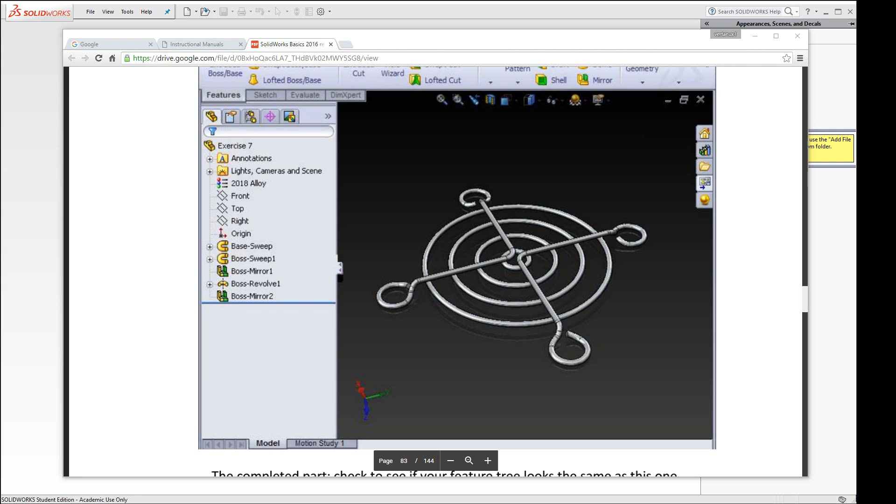So let's begin at the very start here. We're going to go ahead and just draw one of the foot pads first. And you can see here it's a combination of two sketches, a front and a right side view.

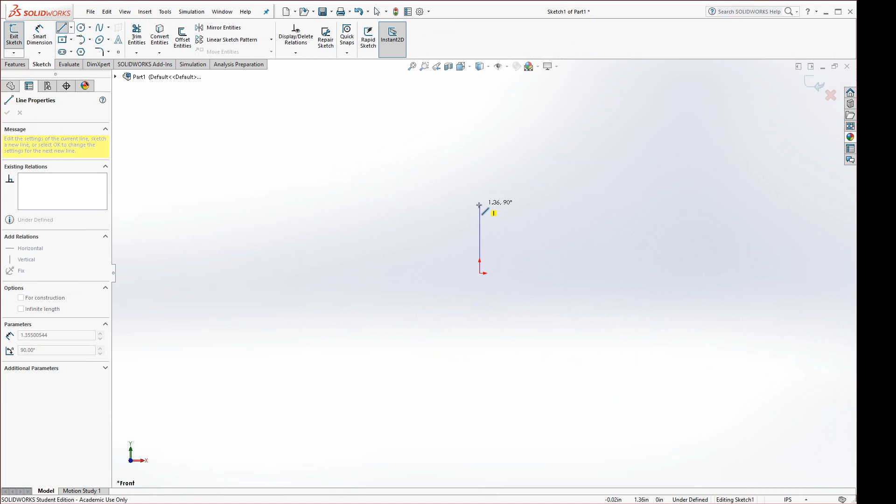Start off with a new part file. Select the front plane and start a sketch. Take the line tool and at the origin, snap to it and draw out a short line about 1.5 inches in height. Make sure it's vertical, and then hit escape.

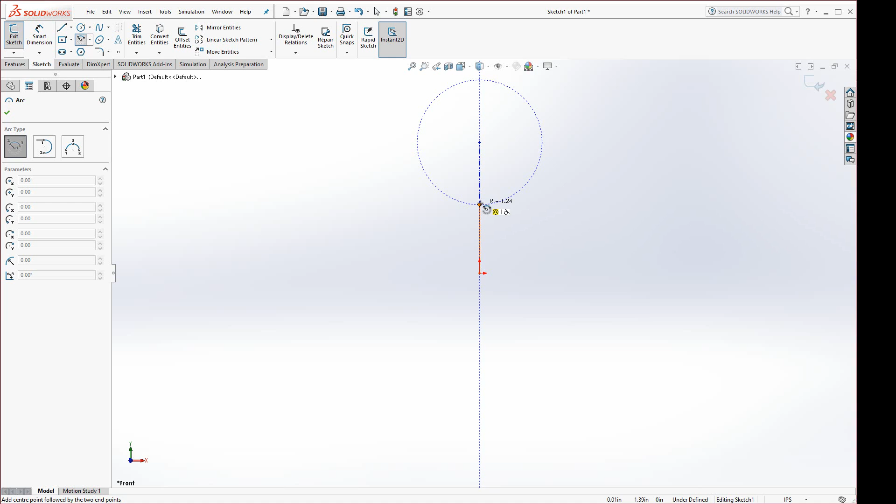Now go ahead and go to the arc tools, hit the little arrow to the right of it, and find center point arc. With center point arc, move your pointer directly above and in alignment with the line you just drew. When you get the inference, click and connect it to the vertex of the line that was drawn earlier. Click again once you connect, and then move your pointer counterclockwise, from the 6 o'clock to 3 o'clock to 12 o'clock.

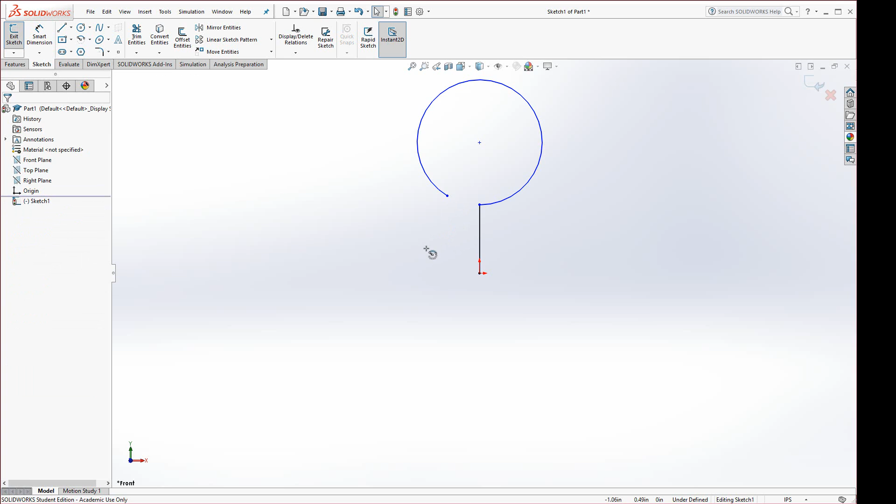In this case, actually, you want to get to right about 7 o'clock-ish. In other words, A is equal to about 320 something degrees, approximately there. Click, and that leaves a little opening. Now go ahead and hit escape a couple times on your keyboard and hit the F key to fit it.

We want to snap this point in alignment vertical to this. So go ahead and select this line and hold Control and select the center point, and on the left, make it coincident. It looks at that line as if it's infinite. Now it's not going to move left or right.

The next thing we're going to do is go to the Smart Dimension tool and add some dimensions here. So if you click on this endpoint here to the arc, drag out the dimension, and if we look at our book, it's supposed to be 4 inches.

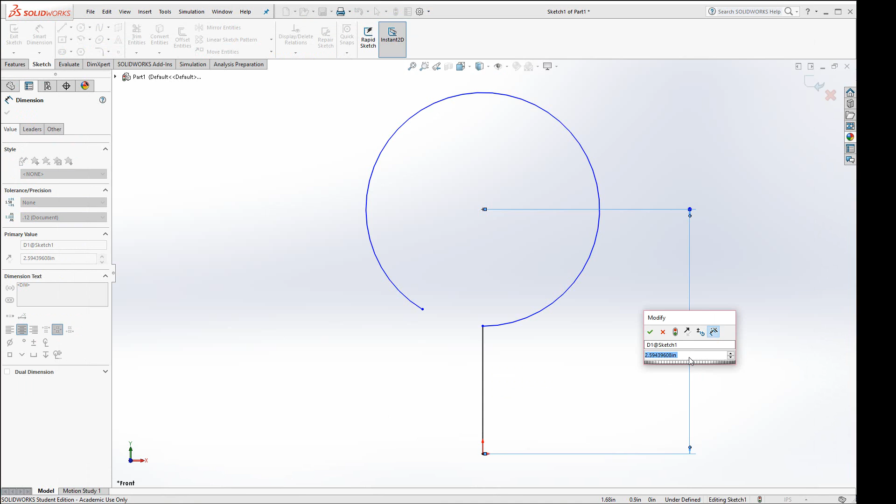Alright, the next dimension we're going to add is the 1.5 inch radius. So that's just on the arc, 1.5.

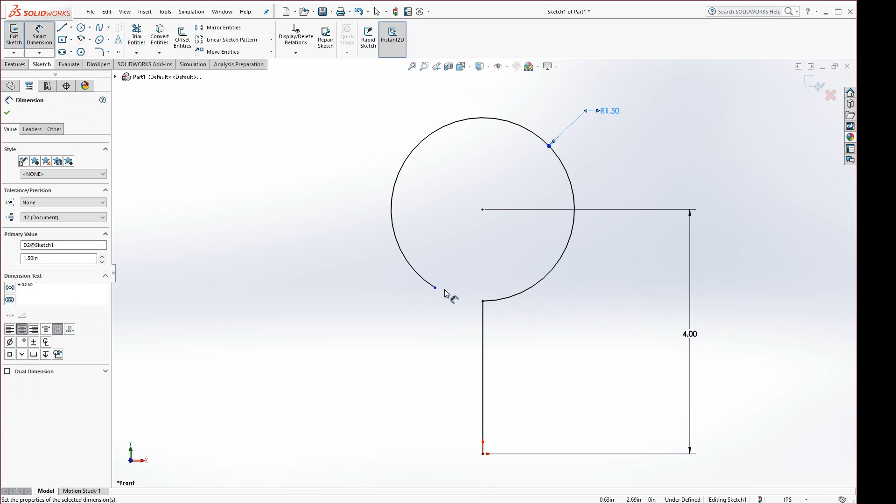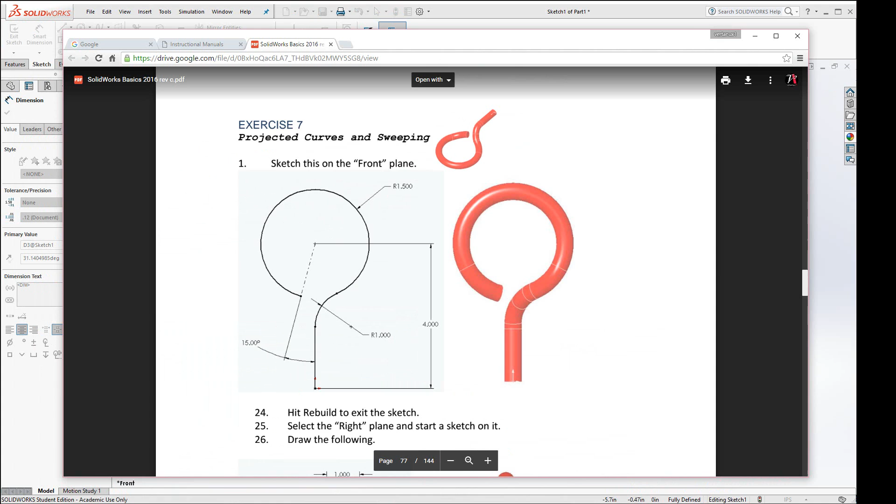Then go ahead, we're going to add a dimension for the opening. Here's a little trick: select the endpoint of the opening there and the endpoint over here, and then click on the center point of the arc. Drag between the two, click to drop it, and we need to specify 15 degrees for that. So go ahead and type in 15 and hit enter. Make sure it's centered in between there.

Okay, now we could add our sketched fillet. So go to the Sketch Fillet tool, and let's set it to 1 inch, and select this intersection and hit the green check.

Now go ahead and to exit the sketch, you could either hit exit sketch on the left or hit rebuild. Either one is fine. If you rotate this around, you can see it's just flat and planar. So that's looking at this little foot pad from the top, or in this case the front.

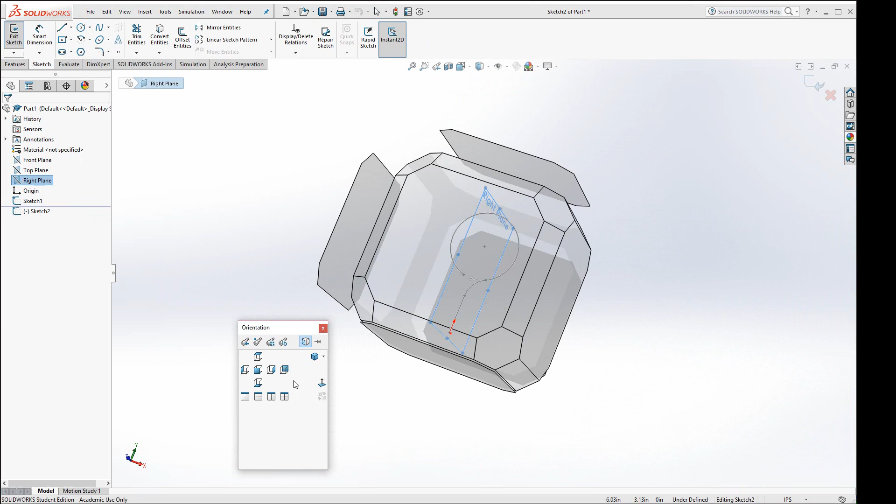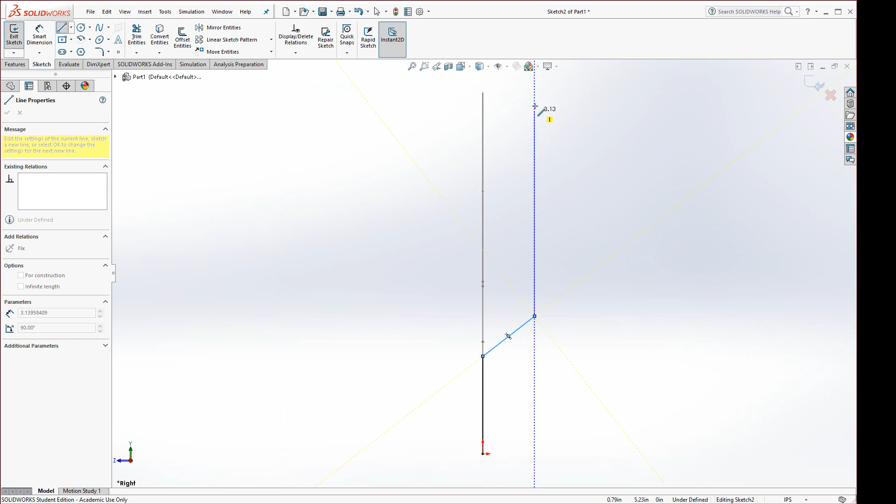Let's go ahead and select the right plane now and start a sketch and draw the right profile. I'm going to hit the space bar and go to the right view and take your line tool and glide up to the very bottom here to the origin. When you get the orange dot, click, drag it up about 1.5 inches. Make sure it's on the line, click, drag at an angle about 1 inch. Don't worry too much about the angle just yet. Then just drag up a line about 3.5 inches and then hit escape.

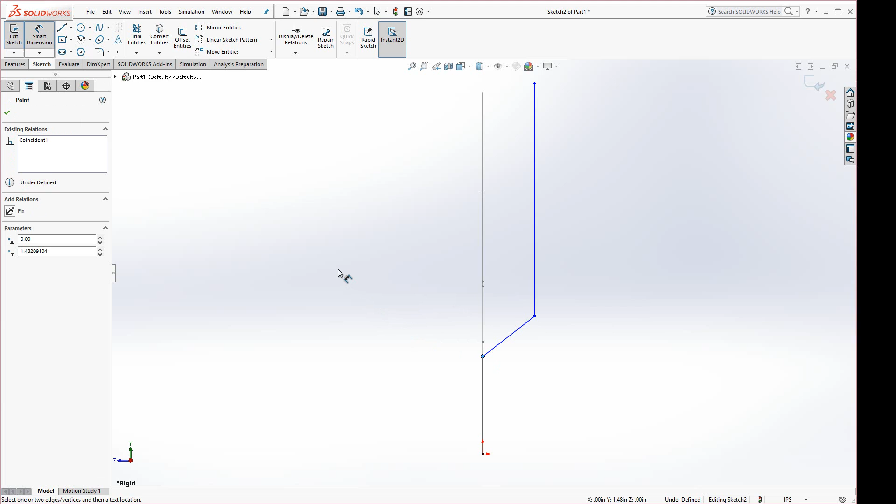Go to the Smart Dimension tool for the first couple of dimensions we need to add. Looking at the book here, we have a 2.0 TSC, which indicates a theoretical sharp corner. Go ahead and select this corner, then move your pointer away and hit the right arrow key one time to expose the center point of the arc we want to attach it to.

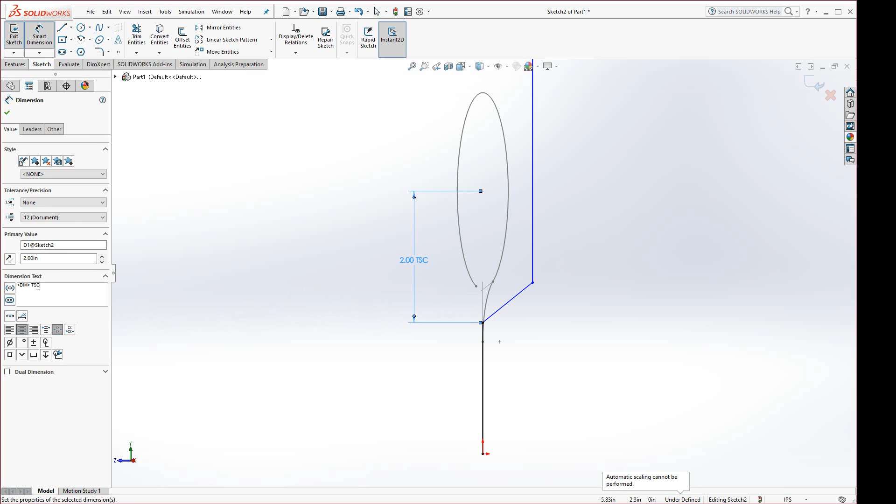Click and drag this over to the left, click to drop it, type in 2 and hit enter. While that's still active, if you wanted for later use you could type in TSC, though it's not necessary. Hit the left arrow key one time to rotate back in position, or spacebar, and select the right view orientation.

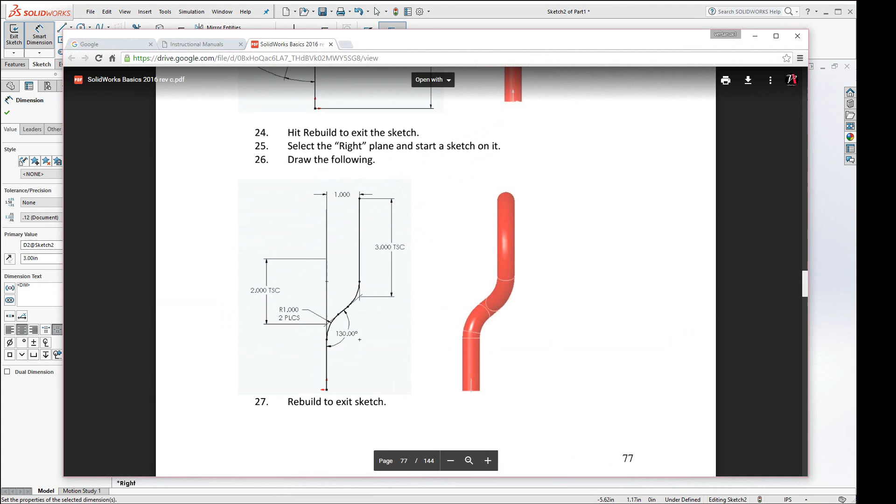Let's go back to Smart Dimension and add the next dimension, this 3-inch. Click on this, that's going to be 3. Now let's add the angle of 130 degrees. Click on this line to this angle, and there, 130. Then click on this line and drag it straight up, somewhere in the middle here, click and make that 1 inch.

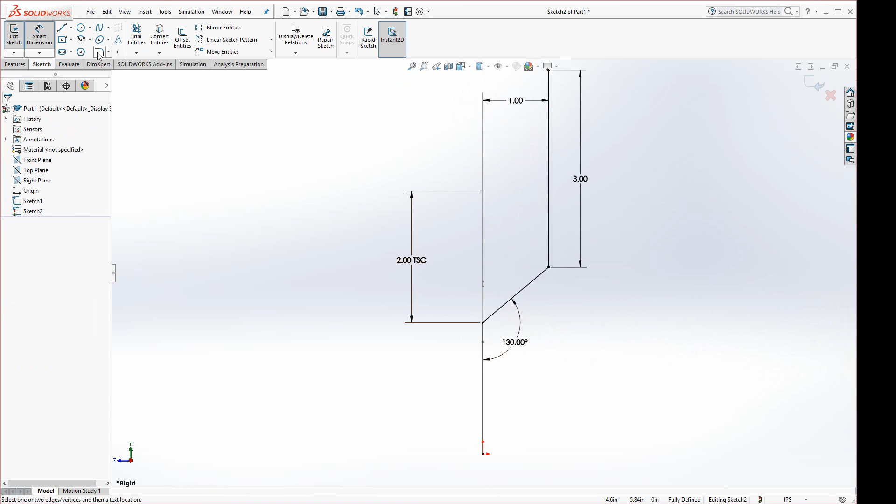Now we could go ahead and add the 1-inch radiuses. Go to the sketch fillet, and it should remember from last time. Just click on the 2 intersections and hit the green check.

As we rotate this, you can see now we have 2 separate sketches. Hit the rebuild button, and the goal here is to combine those two, the attributes of both. Imagine this one down here is a right side profile of a tool, like a die, and we want to bend this curve onto it. That's what we're going to do - we just go to Insert, Curve, and Project it.

You'll notice you have Sketch on faces. You could do it where you actually make the tool and then have it bend it on there, or just go to Sketch on a sketch. Now it's not technically bending, it's just adopting the attributes of both.

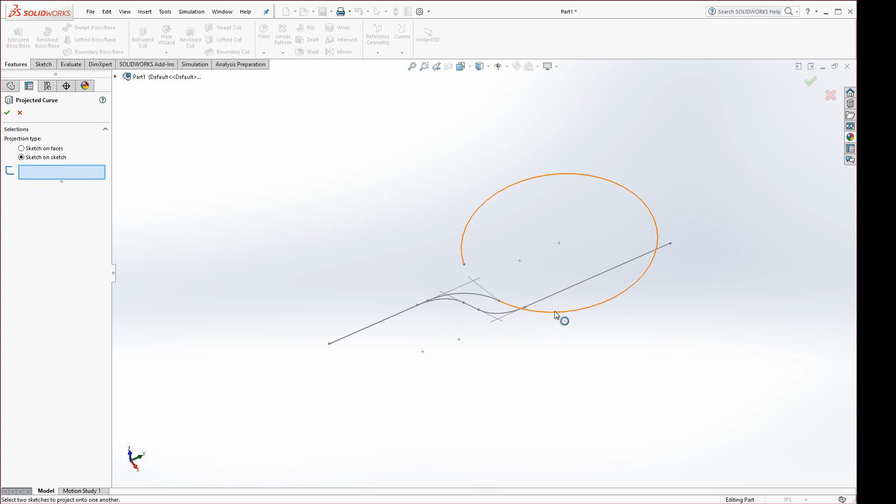Go ahead and select both of these curves, and you'll see a preview in yellow up here. Hit the green check mark, and then click off of it, and now you can see we have our 3D guide curve.

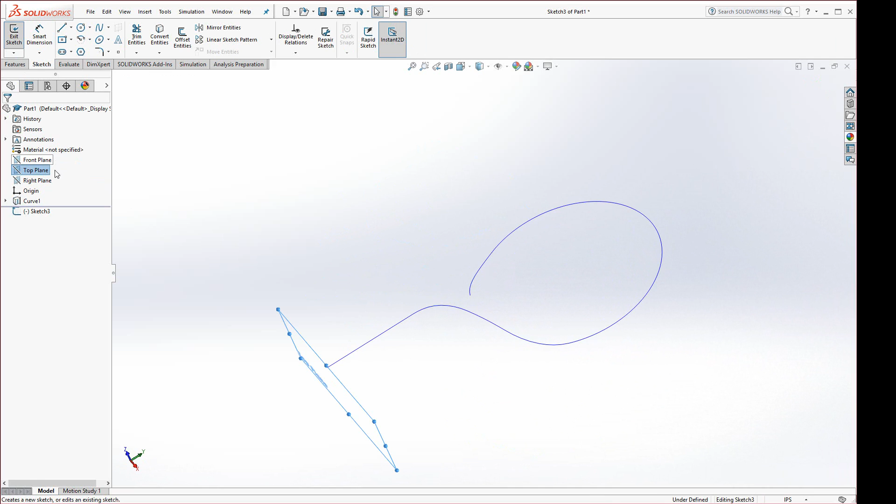Go ahead and select the top plane and start a sketch. Take the circle tool, and at the origin, make sure you get the orange dot, click and drag out a circle. Let's dimension that at 0.5.

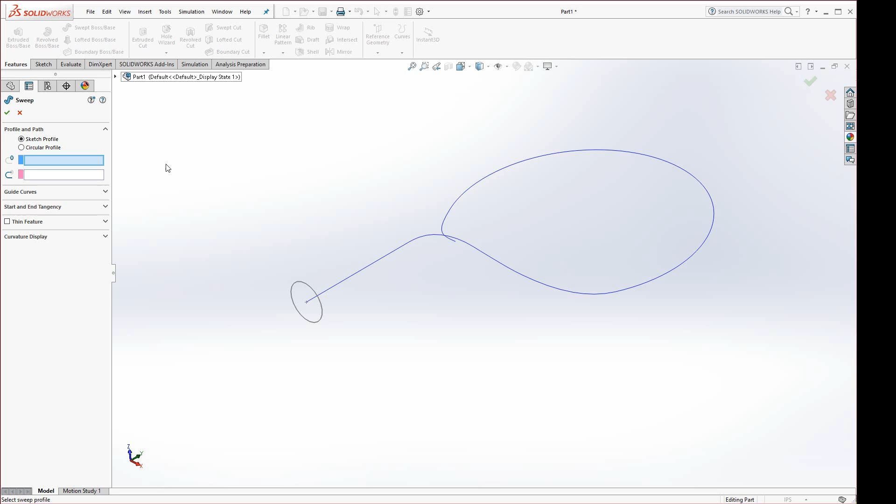Now go ahead and hit rebuild. It's important to exit out of the sketch before you can sweep. So now you could go to Swept Boss Base, select the circle for the profile, and then the blue curve for the path.

You could right click. Okay, and so here we have our profile, or I should say our model. We could hide the curves if we hit this little arrow, right click on the curve - it is actually turned off. Oh, I'm sorry, right here, right click and hide. So we don't need to see that.

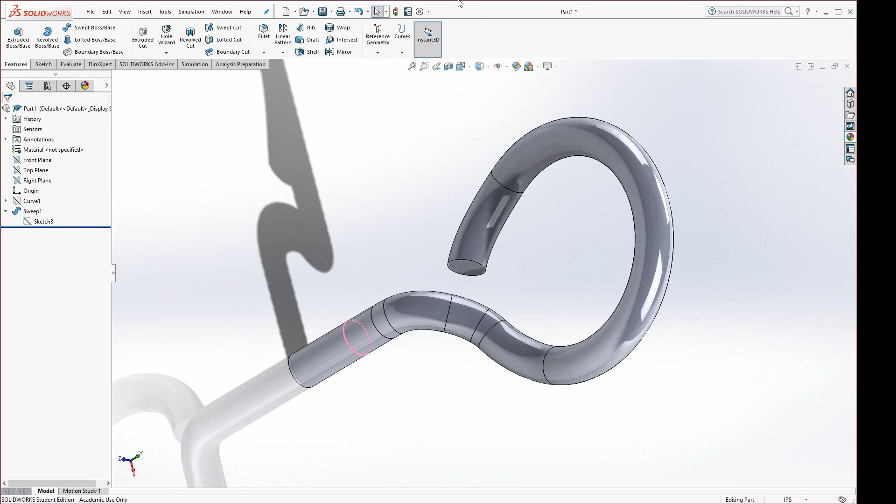Now the next thing we're going to do is draw the extension of this. We could have drawn the extension to begin with. I've just learned over the years of teaching this that sometimes it's better to take it in small chunks for students' sake. But if you're a more advanced user, by all means you could have done this all in one shot.

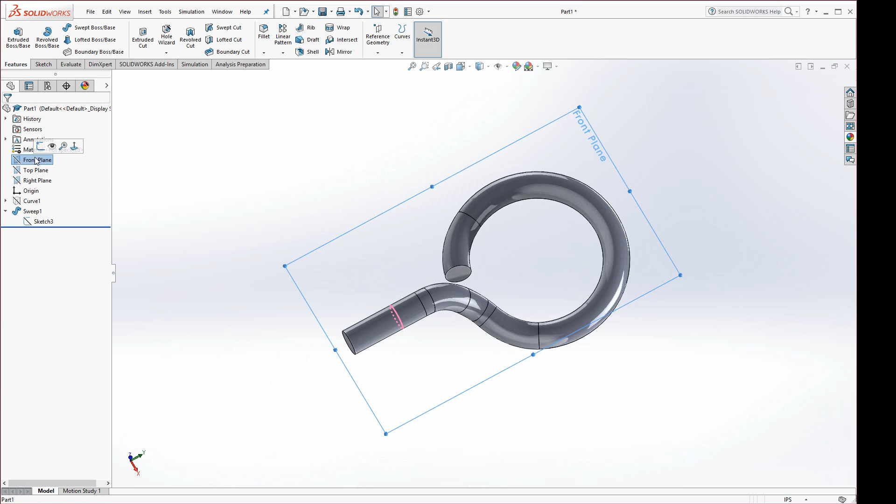So now I'm going to go ahead and select the front plane and start a sketch. I'm going to go normal to - oops, I'm actually just going to click on front. Now I'm going to take my line tool, and at that origin click and drag a 7-inch line down. Now you could actually just move your pointer out.

Instead of going to tangent arc, which you could do by activating the icon, you could just tag back where you started and drag it straight down and to the left. I didn't click, I just tagged back where I started, and so it leaves a little hook here. The angle should be less than 90 degrees on this one, and the radius is going to be about 1 inch. So click - you'll see where I'm going with this in just a minute.

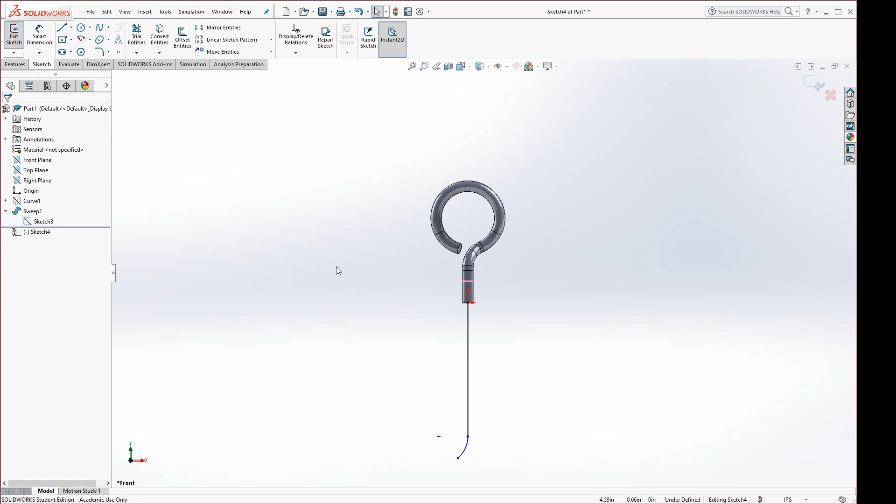Go to Smart Dimension, add your 7-inch dimension for the length of the line, add a 1-inch radius, and now we'll repeat the steps where we made that opening here. Same thing, just click on the two ends of the arc and then the center point of the arc, and drag this out to the lower right. That's going to be 45 degrees.

Now I'm going to hit rebuild to exit the sketch. I could go ahead and select this face here and start a sketch. So don't miss that step. You have to start a sketch on this face.

While that face is selected, or if you select the edge, either one, go to Convert Entities. Convert Entities is a great tool. It projects the edges off of any geometry that you have on the screen, virtually any geometry.

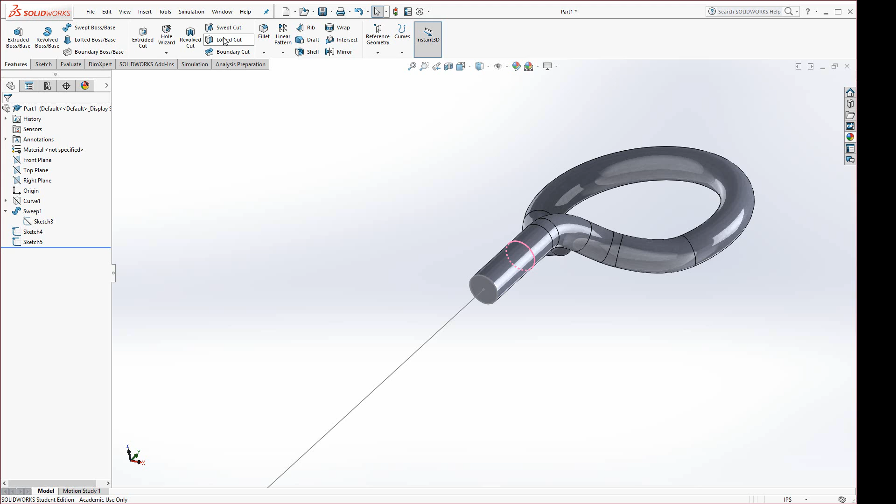And so now we could hit Rebuild and go to Swept Boss Base. Go ahead and click on the new profile and then select the path. And you'll see it will continue on. Hit the green check. And again, you could have done this all in one shot if you wanted.

All right, the next thing we're going to do is we're going to mirror across that face. Since we had it at 45 degrees, when we mirror it across, we'll have a full 90 elbow. So let's go to the mirror tool.

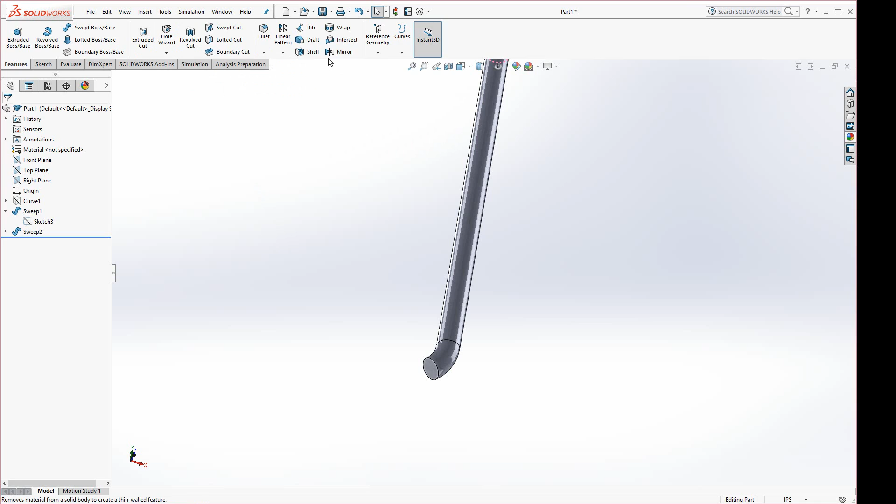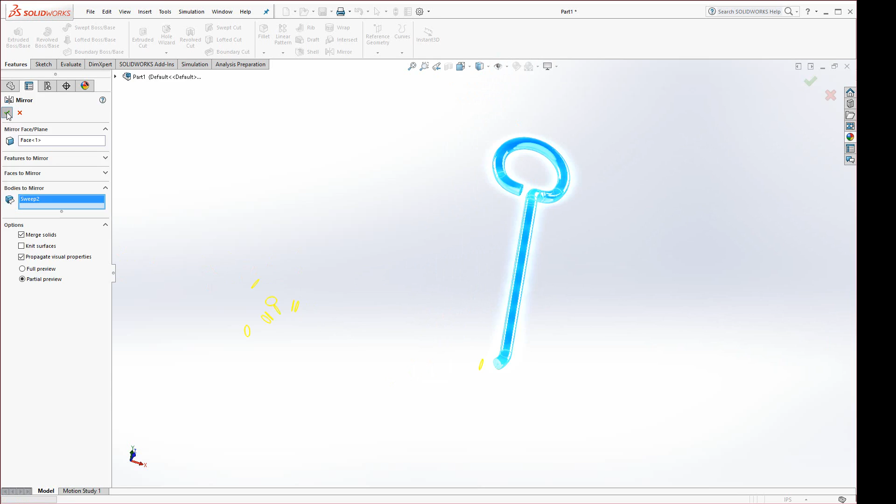For faces to mirror across, just go ahead and select this face. And click in the bodies to mirror. Use the bodies to mirror for this one. You won't see a very good preview because it's all radial edges, so they don't show up as you might expect in the preview. So don't worry, just hit the green check, and it should turn out with a 90-degree elbow.

Now let's go ahead and select the right plane and start a sketch, because we're going to put in the concentric rings.

Now zoom up to the very bottom here. There's a couple things we need to do. Go ahead, and it's a good idea at this point to change it to wireframe temporarily.

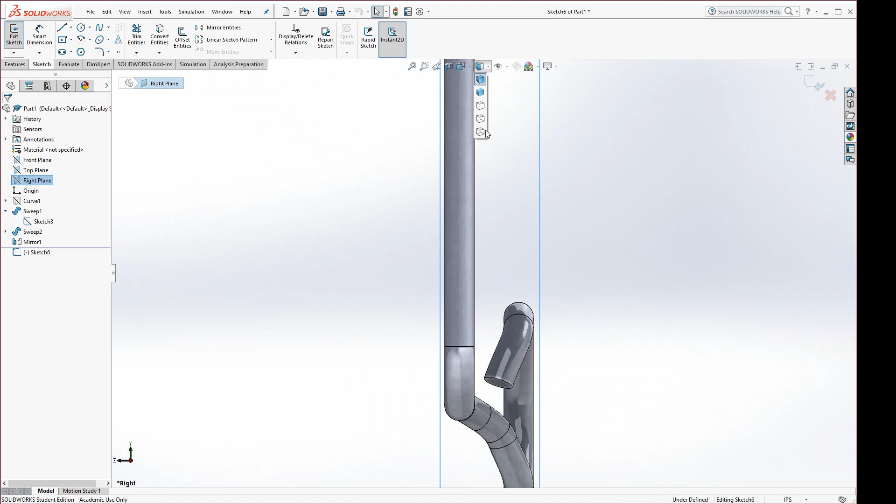Now again, I'm zoomed up at the bottom here. I'm just going to hit escape. And I want to capture this edge here so I could snap a center line to it, because we need a center line to locate the center of the entire model once it's completed. And thus, to complete it, we need the center line.

So click on this little arrow, find the center line tool. Move over to this edge. When it wakes up that center point, move to the center point, click, and drag a horizontal center line across, about 1.5 inches. As long as it's horizontal, you're in good shape. If it's blue, delete it and try that again, because you might have missed that center point.

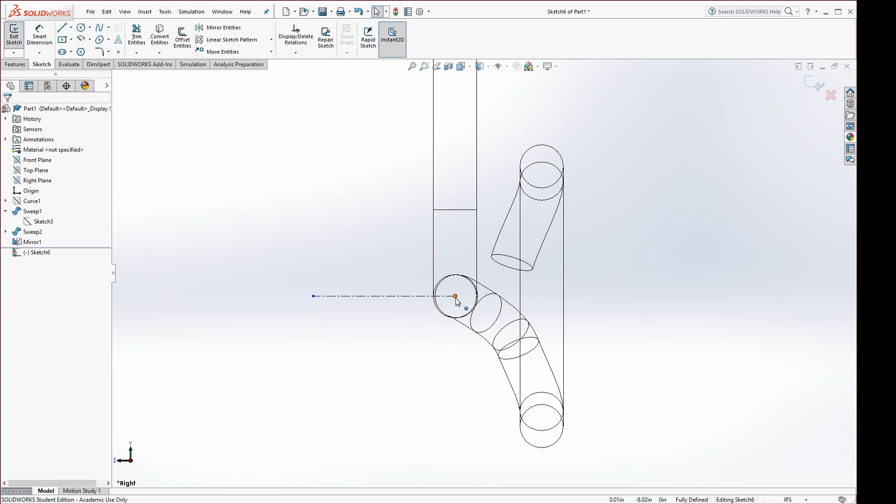Okay, the next thing we're going to do is, you could just stay zoomed up here. Take another circle. And over here, click and drag out a circle. Don't touch the edges. Just draw it in between these two entities here.

Now, what we're going to do is I'm going to go ahead and hit escape. And we wanted to match the same thickness of the wire we used for the rest of the model. So go ahead and select this edge, and then hold Control and select this circle, and make them equal. That way they're both going to be 1/2 inch. So if we change the entire wire specification, everything changes, which might not be what you want necessarily, but in this case I do want that.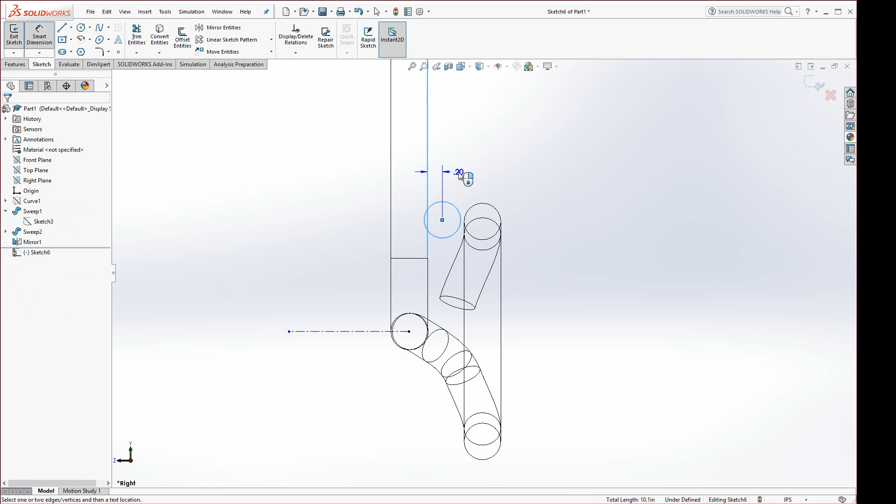Okay, go to Smart Dimension. Now we're going to go ahead and click on this, and then click on this edge here, and just make that 0.23. And the reason why I'm making it 0.23 is so it digs in a little bit.

Be aware, if you made it tangent to where it was floating just on the edge, you might get a little error message. And the way to override that, you would actually just make it a separate volume. So when you revolve this, you would deactivate the little merge option. But we actually want it to merge like it's welded a little bit together, okay?

And so the next one, go ahead and click on this circle and dimension it to the center line. And this needs to be 1.5 inches. And now it should be fully defined.

Hit escape. Next thing is we're going to take a look at the linear sketch patterns. The first thing you want to do is select what you want to pattern, in this case, the circle.

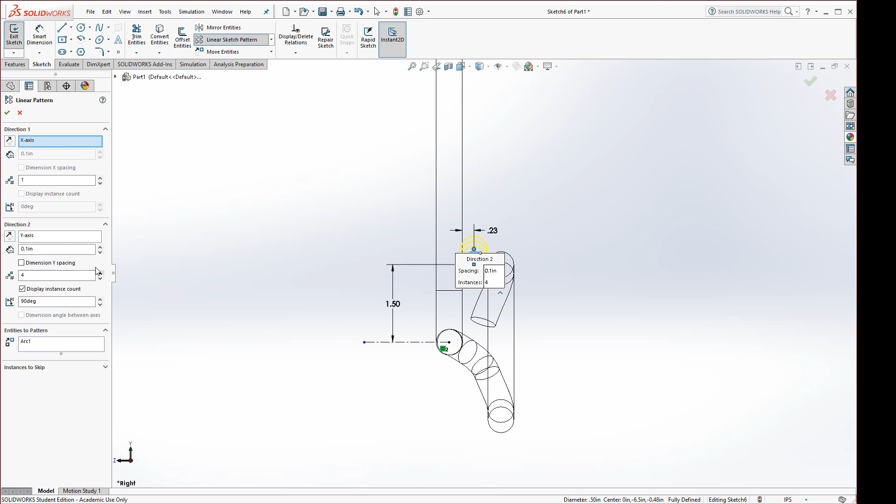The next step is to go to the linear sketch pattern option up here. You can see immediately it's moving horizontal, but we don't want that. Just set this little switch down to 1. But we do want direction 2, so bump that up to 4. Then the spacing is going to be 2.5 inches. Hit enter, and then zoom out just to make sure it looks correct.

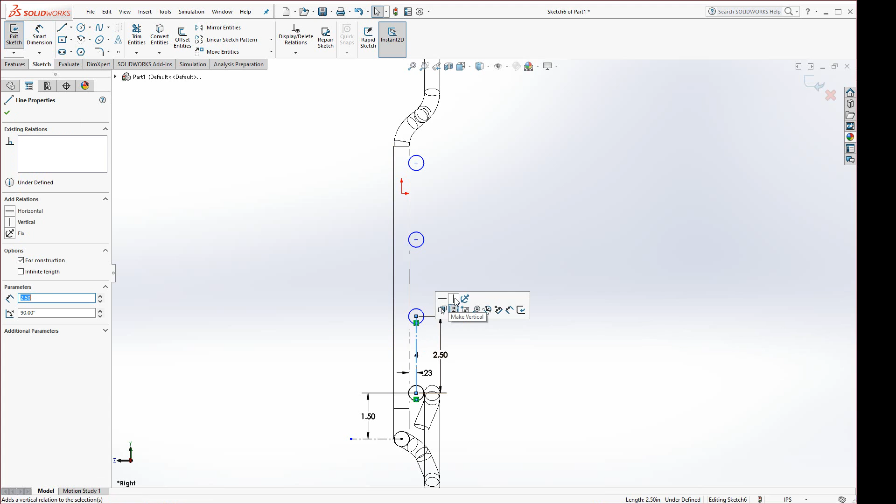Before you hit enter, go ahead and select dimension Y spacing. That will add a dimension in, and thus we're going to have it almost nearly fully defined, with the exception of one thing we need to define. Hit escape, just click on this line, the center line that it generated, and make it vertical, and then it's fully defined.

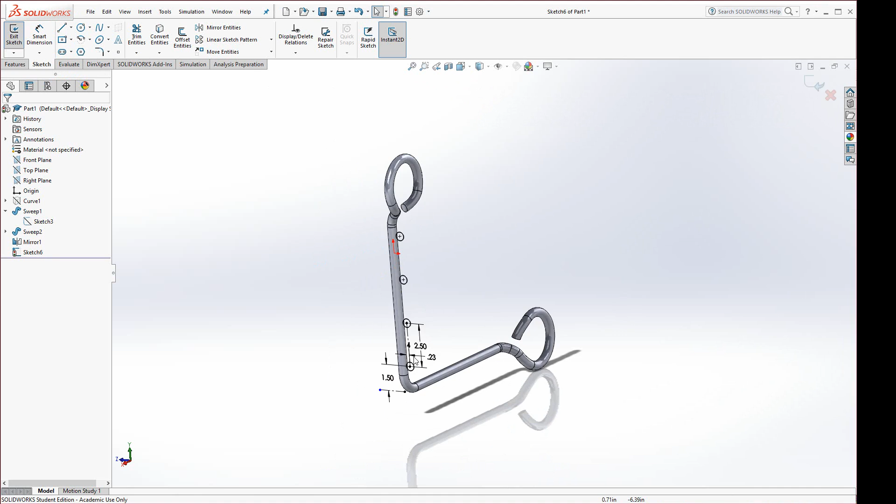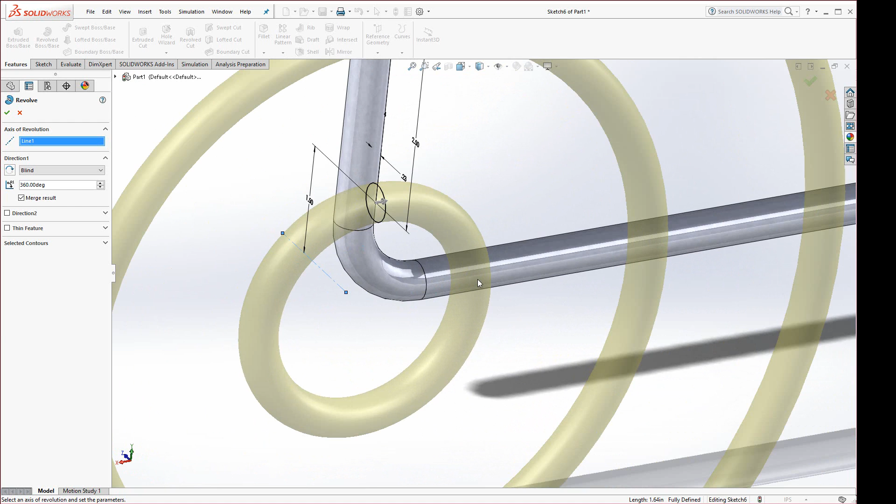Now we are ready to go ahead and revolve. We want to capture 180 degrees, or half of the grill, and then mirror it over. So let's go back to shaded mode, and I'm going to go ahead and revolve this. I'll go to Features, Revolve, and we're going to have to select that center line right there. Notice what that did - that center line center point was locked in to the intersection, essentially the center of the wire, thus making a center for us that we could revolve around.

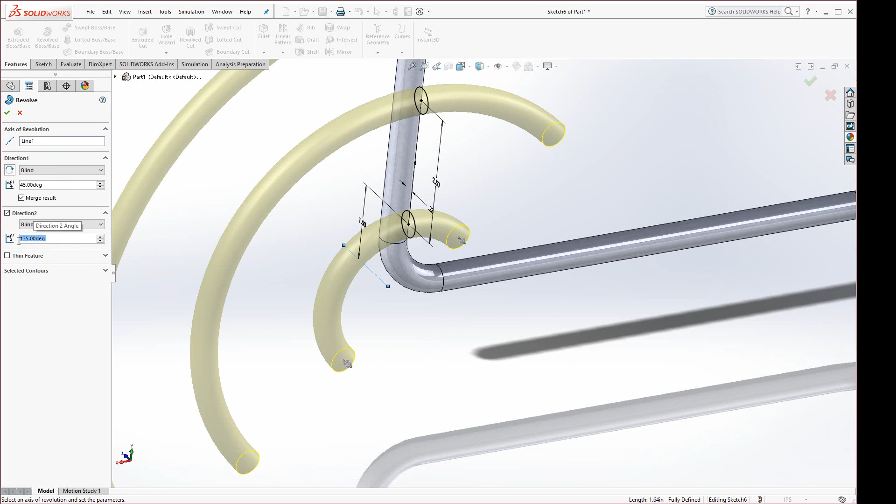Now we don't want it to go full 360 degrees. We actually want it to go, instead, make it 45, and then have direction 2 of 135, which if you add the two together makes 180 degrees. However, its current status is not usable, it's not feasible, so you want to hit this reverse direction switch. Now we get exactly half of our entire model. Hit the green check - see what I mean by efficient? Look at the feature tree - minimal sweeps. Could have actually even reduced that.

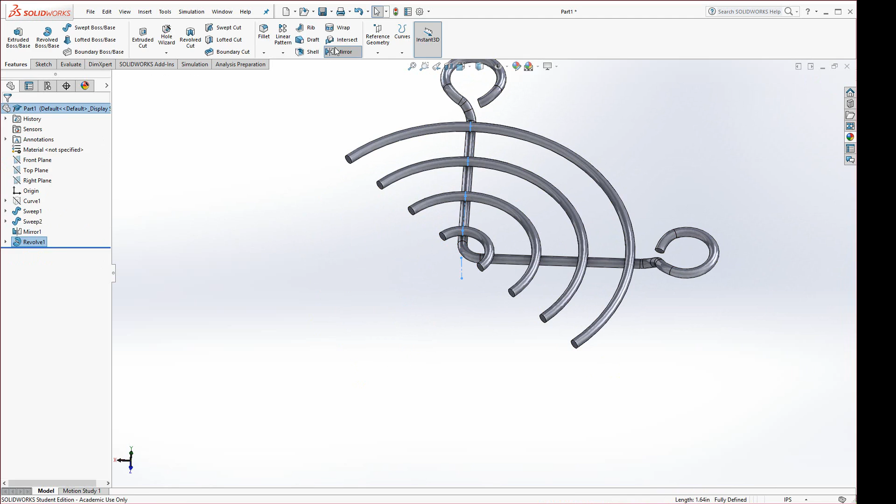But now let's go to the mirror. The mirror face or plane would be this one, any one of these little end faces. Let's clear that selection - we don't want features to mirror, we want bodies to mirror. Take everything, click on the body. Again, the preview isn't exactly very helpful. Go ahead and hit the enter button, and now you should have your exercise 7 part complete.

So what we saw there were a couple tips and tricks, but really this 3D combination of two sketches is very useful at times. Now there is a 3D sketch tool, be aware, and that's what I'm going to take a look at next. Start a new part file.

And you don't have to select the planes. Instead, go to the sketch and hit the little arrow underneath the sketch tool, and you'll find 3D sketch. There you see the origin, and you have an array of tools. Some you're not able to use, all of them that you might be familiar with from the 2D sketches, but that's okay. Go to the line tool here and line yourself in the center there.

Once it snaps, click and drag it vertical, and we're going to drag this up 2 inches. Get it as close as you can - it doesn't have to be perfect. Just get the feedback, like 1.96. That's fine. Click.

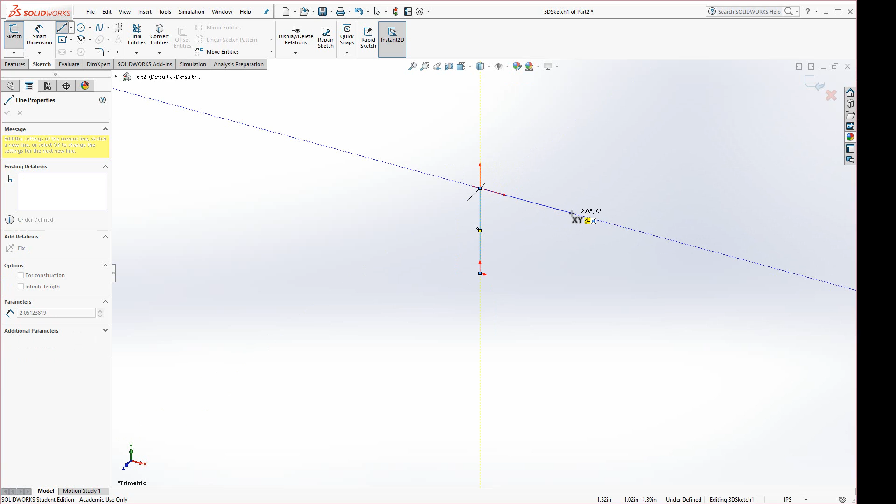Now, we're making a chair, if you've ever seen those wire chairs essentially. And I'm going to go across - again, everything is just going to be 2 inches, just to keep it simple in this exercise. Click, and I'm making the back of the chair. Now down here, we could infer to this without clicking. Oops, let's get that - I'm not inferring too well there. That's okay, I'm just going to go about 2 inches. Click.

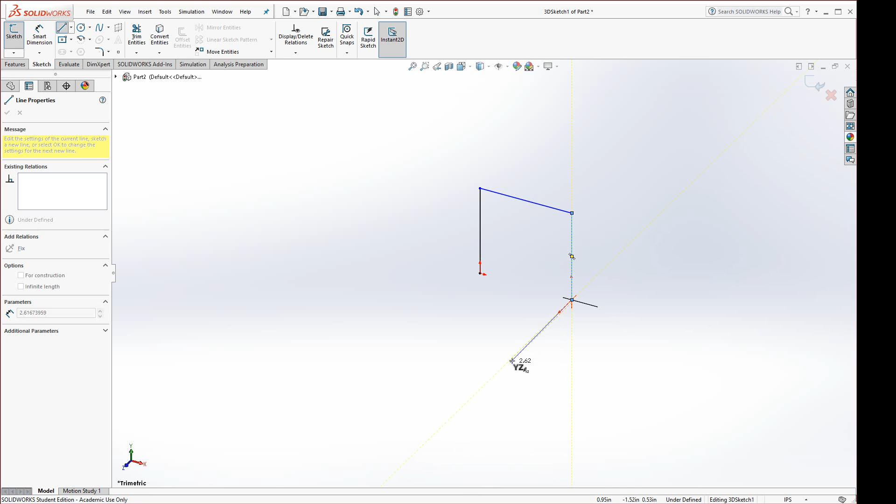Now I want it to go forward. The tab key on your keyboard does this. Hit it one time, and now it goes in the YZ direction. Again, go about 2 inches. Click.

Now here's the thing - always make sure, sometimes you have to rotate to see the perspective properly. In this case we want to go down, which is fine, YZ. And again, 2 inches. Click. And then we could go back, YZ, and again 2 inches approximately. Click. Alright, so now we have half of our leg.

We want to go across here 2 inches. Okay, so notice we're in the YZ though - you have to hit the tab key again. And now we could go 2 inches across here, just one hit of the tab key does it.

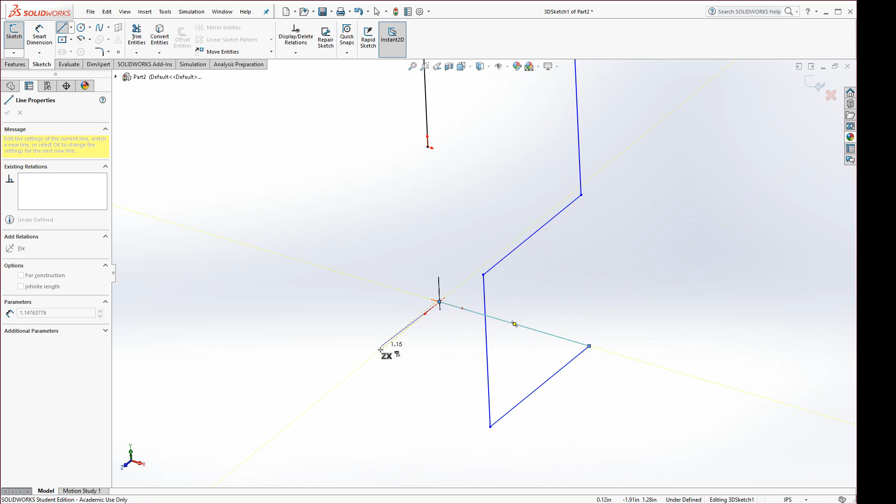And now we want to go forward, just make sure it's going forward this time, which it is, 2 inches. And now I want to drag it up, so you have to hit the tab key again. Approximately 2 inches. And then connect it to the end. Hit escape, and there you have a wire chair there.

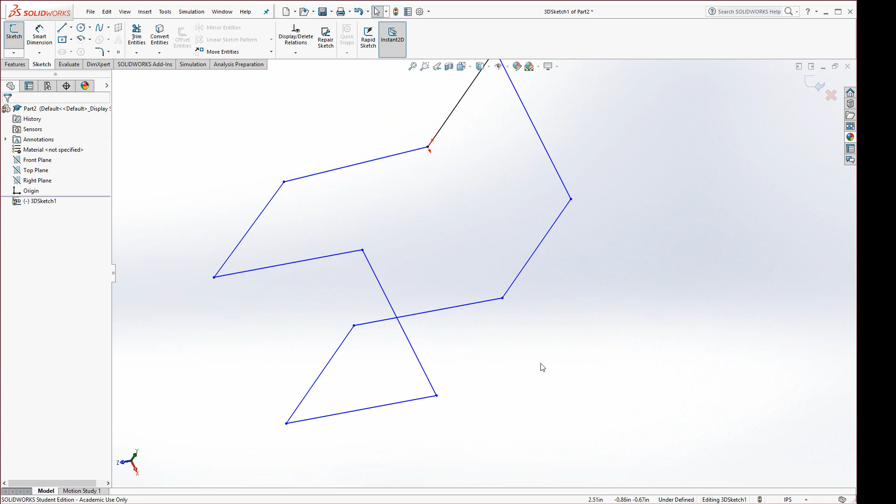And you could use it for sweeps or whatever you're going to do. Notice there's the other tools up here - you could put fillets and radiuses on, so you could adjust that. Let's go ahead and put a 0.5 on a couple of these here.

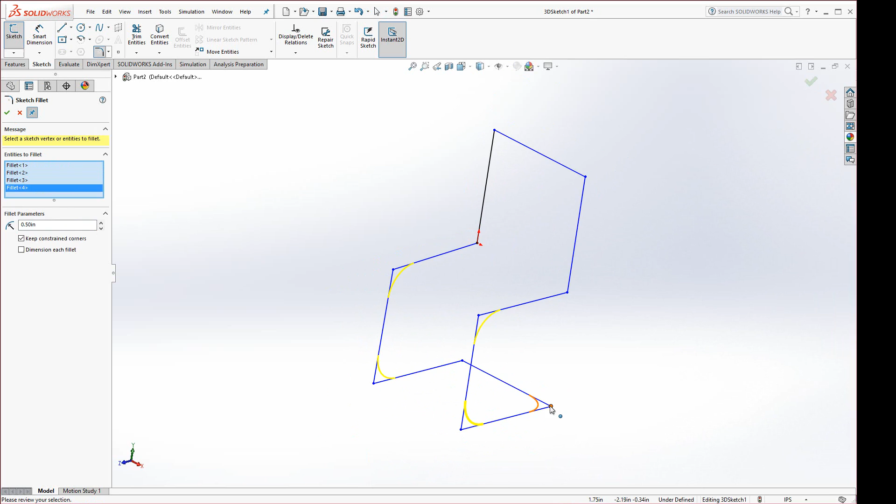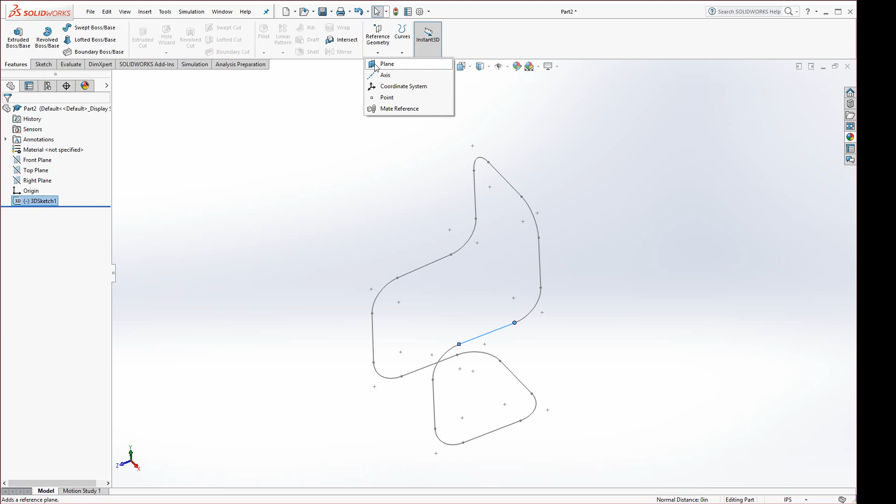Okay, if you wanted to sweep, I'm going to hit rebuild, then control select that line and this endpoint, and go to features and reference geometry to create a plane. Or you could go right to sketch and it will automatically generate a plane if you select that edge. This creates a plane perpendicular to that.

Now let's go to the sketch. Start a sketch on that, click on the edge of the plane. Go to sketch, take a circle, and just put a small circle right on there. Let's hit rebuild, and now let's try and sweep it. I've not done this one before, but let's give it a shot. And there we go—now you have your tubular frame wire or tubular frame chair.

Can hide that. All right, moving along—so that's the 3D sketch. Just remember, under there, 3D sketch. And the tab key is the key to use to transition between X, Y, Z.

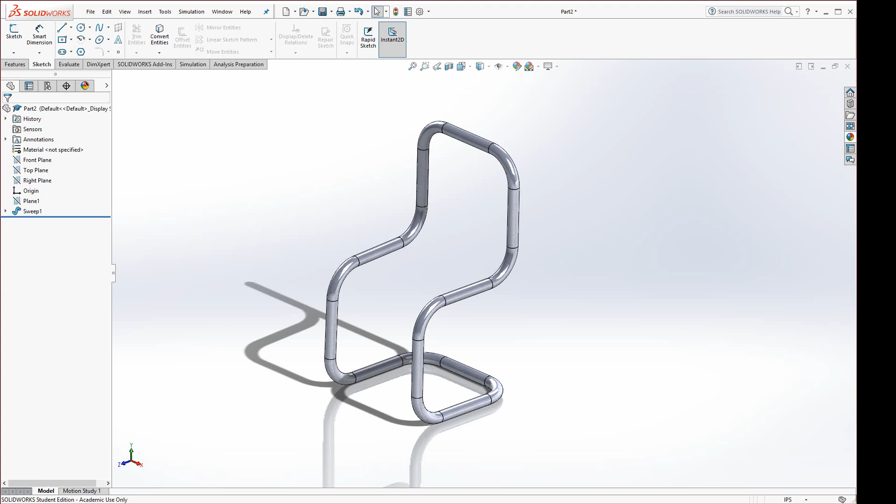So let's go ahead and start that new part. Select the front plane—in this case, actually, I'll do it on the top. Start on the top plane, and I'm going to draw out my circle 2.5 inches.

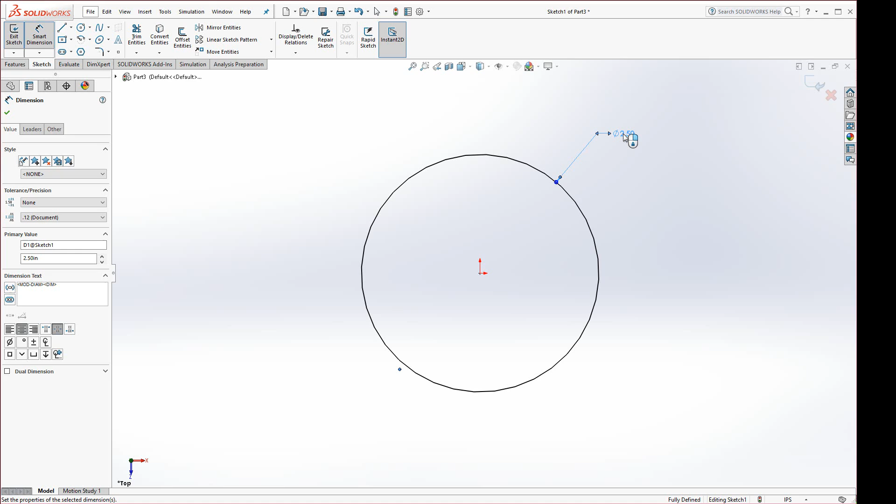Now remember, these ones, my students especially—I really recommend that they try them on your own before you watch my video. At this point, pause it, minimize it, give it a shot on your own, because that's where you're going to learn the most. If you just watch the videos each time, you're not going to learn as much as you would had you tried it first on your own, and then go back and look at how I did it—you might have found a different method than I used, and you're just going to expand your knowledge that way. So just some thoughts there.

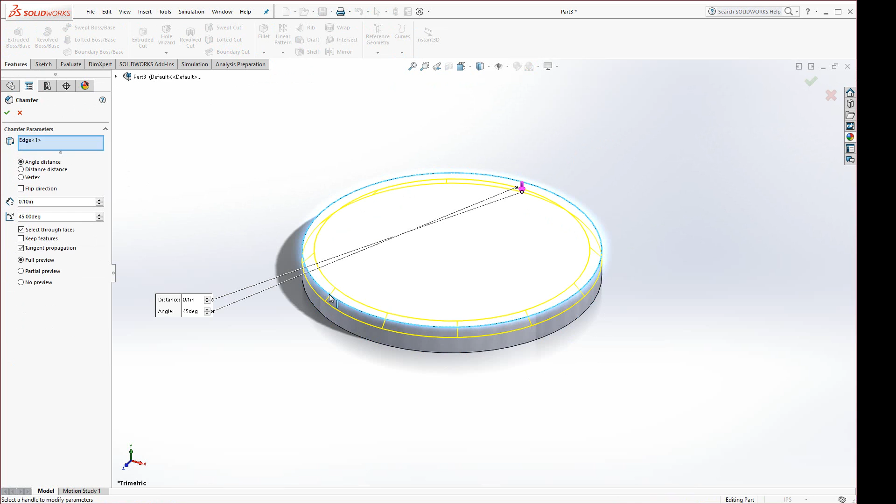Okay, now I'm going to extrude this, and it gets extruded 0.25. Now I'm going to go to the chamfer tool, and it's a 0.1 right on this edge. Hit apply.

Now I'm going to select this face and start my sketch, and go to the top view orientation. We have to position this centered, and it's a 0.75 diameter boss that extends a height here of 0.1.

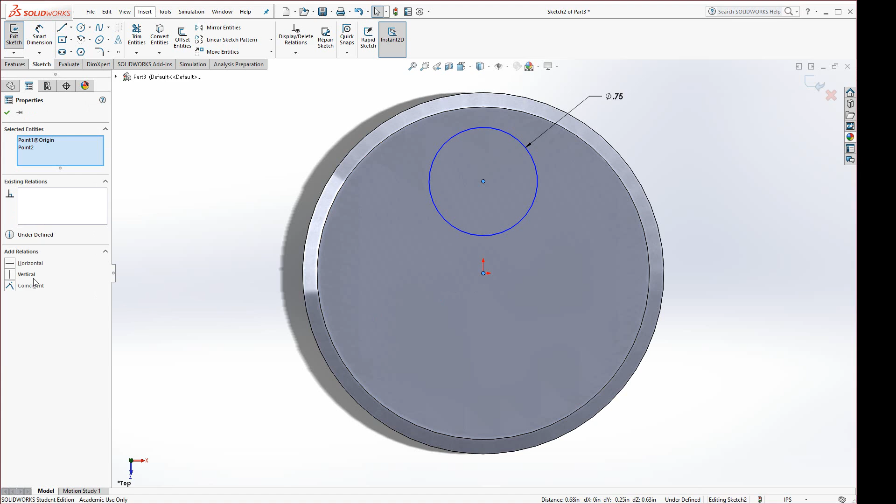So I'm going to go to the circle tool and align myself right about there, draw this out, dimension it at 0.75. Right now it's kind of floating there, so if you just select the center and select this origin, holding control, just make it vertical.

Okay, now let's position it, dimension it to the center, and look at the manual for that one—it's 0.625.

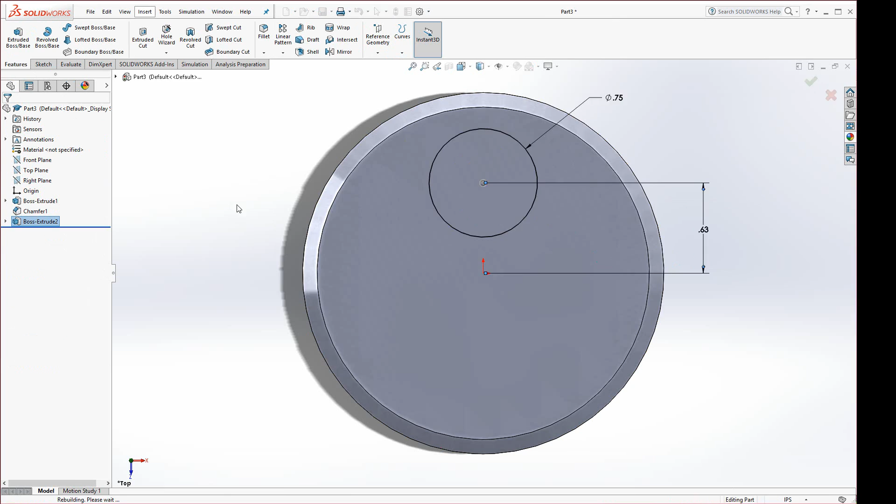All right, extrude that 0.1, and go ahead—we're going to make the fillet on the top there. The fillet, according to the print, is 0.09. Just select this face and hit apply.

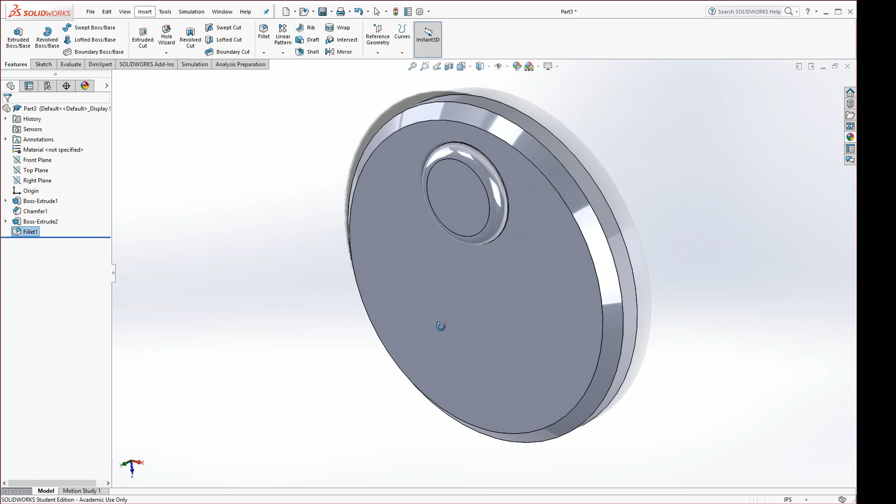Now we're ready to shell it out. Rotate it around the back, go to the shell command. Let's just verify what the typical wall thickness is on this—it is 50 thousandths, so 0.05. Select the back face and hit apply.

Okay, now I'm going to go ahead and put those cutouts in here. Select this face, start a sketch, and let's go normal to it. So we have a cutout here, and it's specified—to the right, 50 thousandths in height, and the depth is 0.1, tangent to the outside edge of that.

So for that, we could actually do it right here on the side. I'm going to use the center rectangle, we'll infer to the center here, right about there, and let's put the dimensions on it—so it's going to be 0.1 by 0.05.

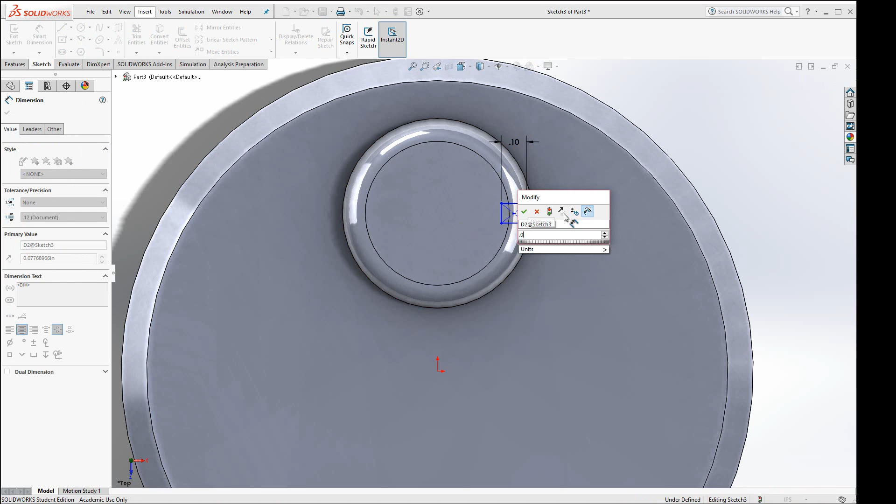Now we could select this face and make it tangent—I should say that edge—to this edge. We'll find tangency, holding control, do that. Now go ahead and select this, and we'll center it. Actually, I wanted to infer to the center there—let's see. We could just go ahead and draw a center line off there. Oops, I accidentally picked the wrong thing there. Okay, I'm in the center line. All right.

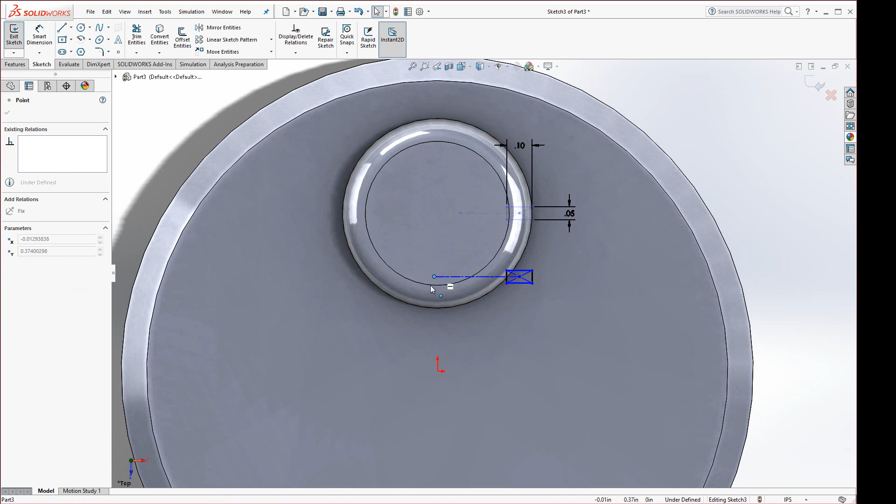Could wake this up and just snap it to it so it's centered. All right, now we just go to Features, Extrude Cut, and we'll select up to Surface. Go ahead and select the surface. And that makes our cutout.

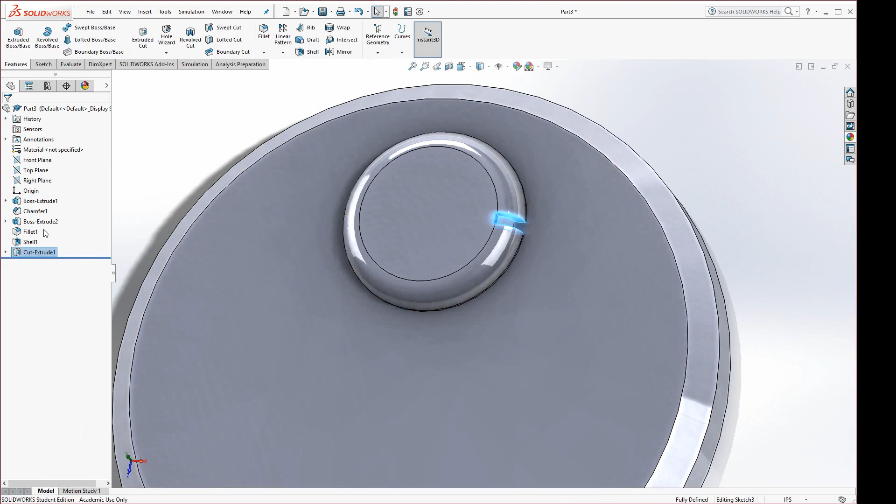In fact, if you wanted to, you could edit that sketch just by right-clicking over here. Go to Edit Sketch. In the center there, let's draw in that circle, because that's a cutout as well. I've neglected to put that in there. So 0.125 through. And now I can hit rebuild.

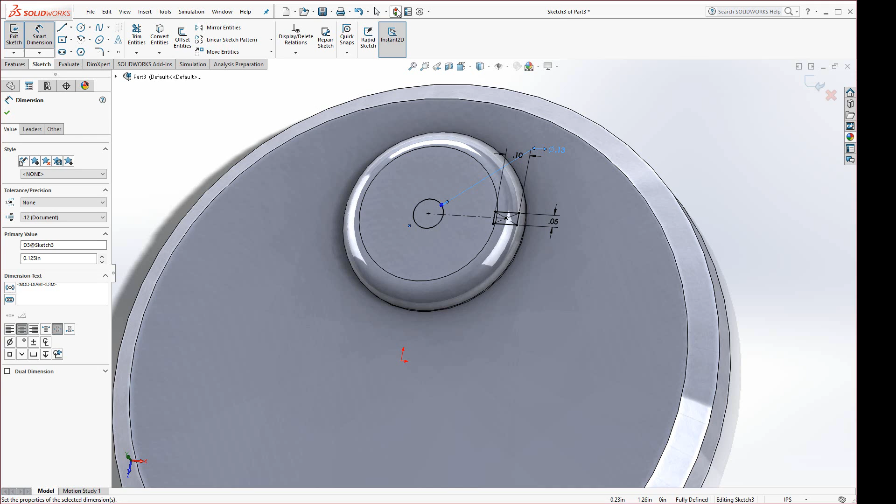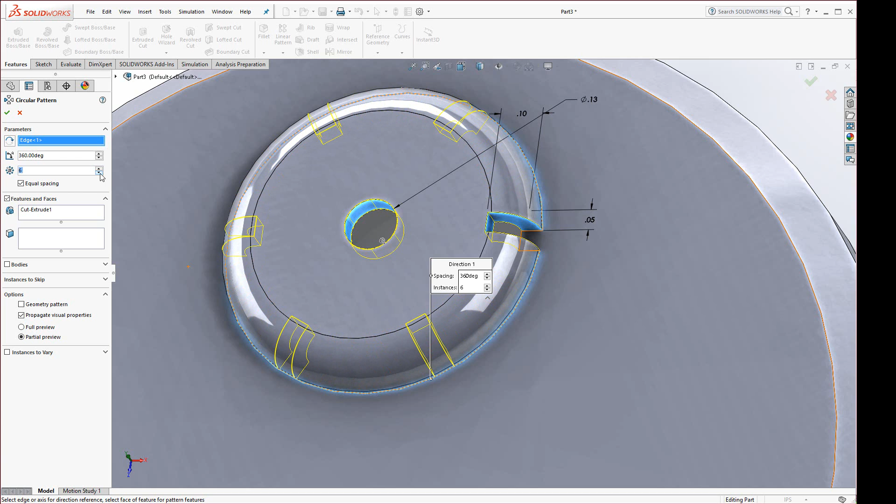Now we'll just pattern that. Select this face, go to circular pattern. You could select this edge. Let's go to parameters here. Select that little box and then select this edge. And then put in the specified amount. I believe there's just 6 on there. Hit the green check.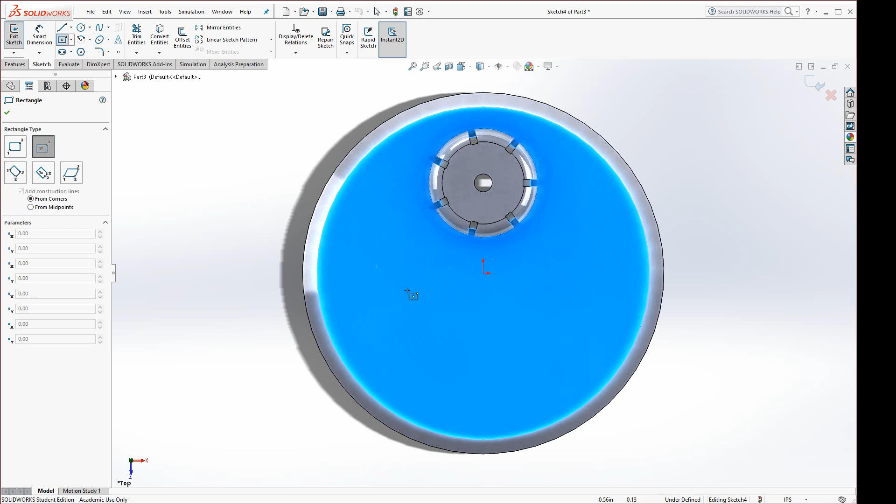Okay, now the cutouts here. Select this face, start a sketch, go normal to, and draw a rectangle. You could have it extending out like that, that's fine.

Okay, and this rectangle needs to be 0.2 and 0.95, and let's see, 0.25 off center. So let's go to Smart Dimension, select this to the origin, 0.25, and then we could select this center to this center and make it horizontal, and go back to Smart Dimension, and let's dimension that line there, and that's supposed to be 0.2.

Okay, I actually get a 0.95. You could put that in if you like, for the length. Or just go with 1 inch, because it really doesn't matter as long as it extends beyond the boundary here.

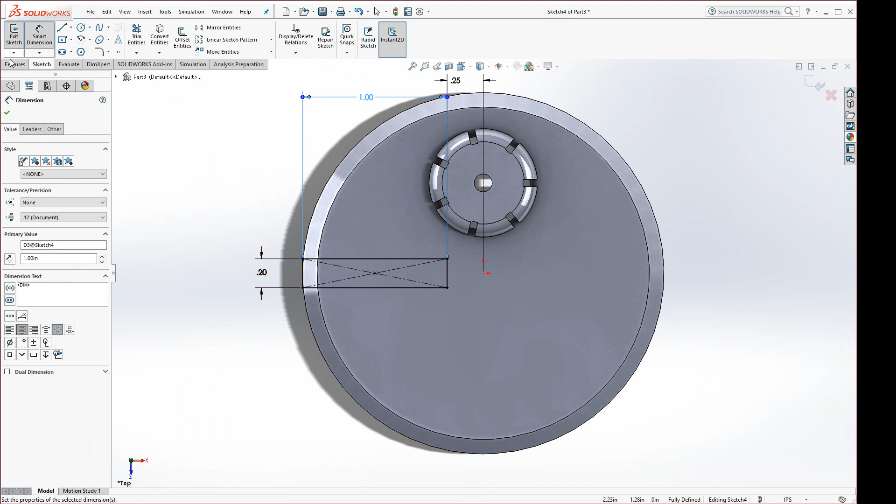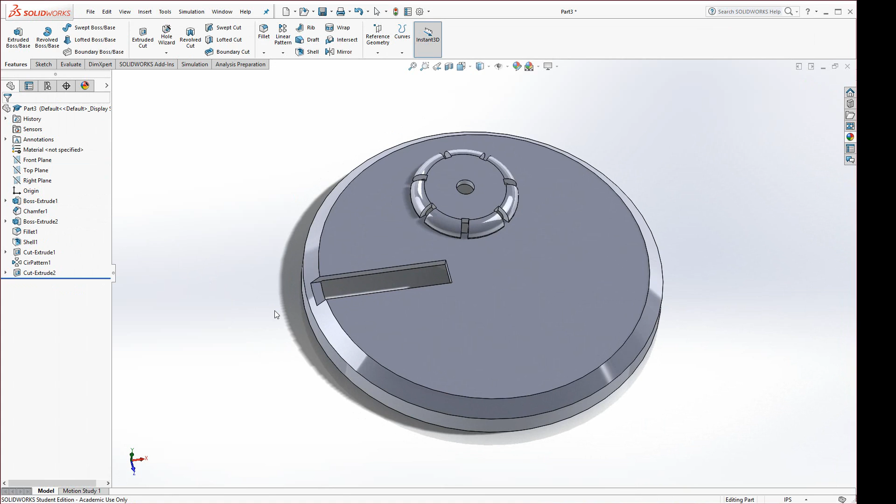Okay, now I'm going to go to Features, Extrude Cut, and the depth is specified on there as well. When you see the DP, that's the depth, so 60 thousandths. So 0.06. And there's our cutout. Now we want to pattern it, and the offset is set to...

Oh, actually it's supposed to be 0.15 wide, and then 0.2 is the offset. So that's an easy fix. Just double click here, double click on this 0.15, and rebuild.

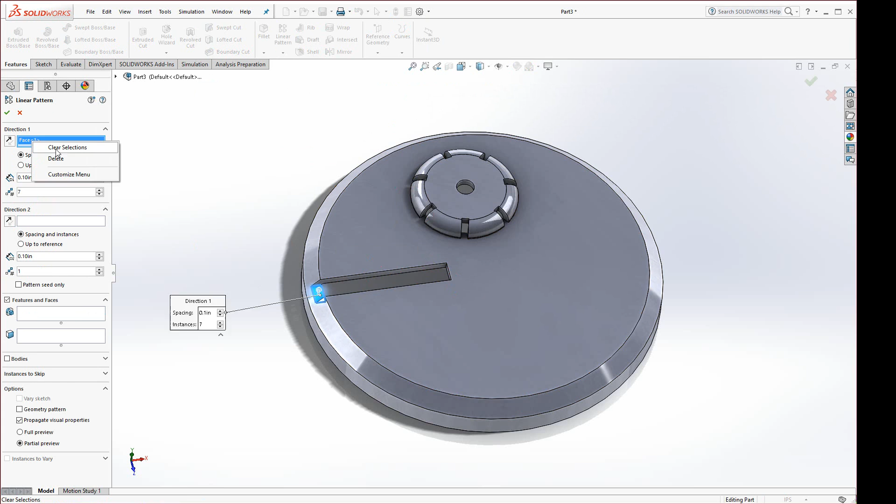And now select that face, go to the linear pattern, select this edge, for direction actually, clear that. I didn't want that as a direction. But we want that as a feature, so click in Features and select that now. And then we just set it to 0.2 for the distance spacing, and just reduce it to 4 instances. Hit the green check, and notice it automatically creates that feature that you have there.

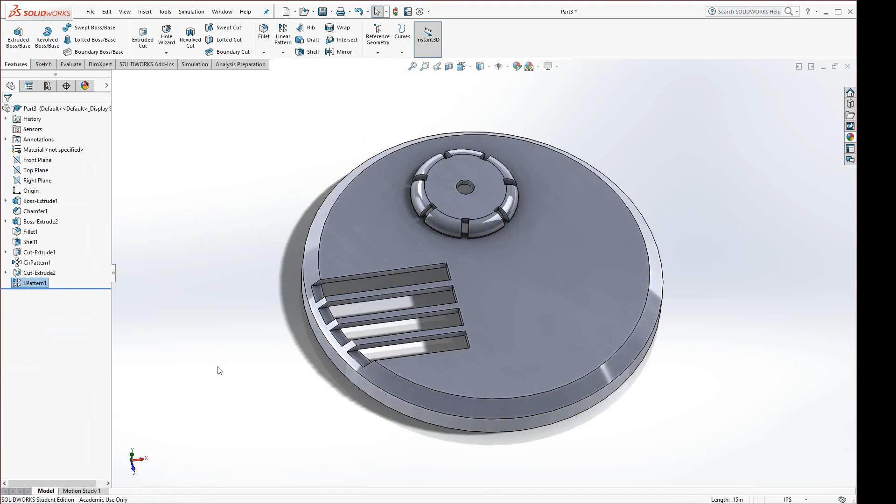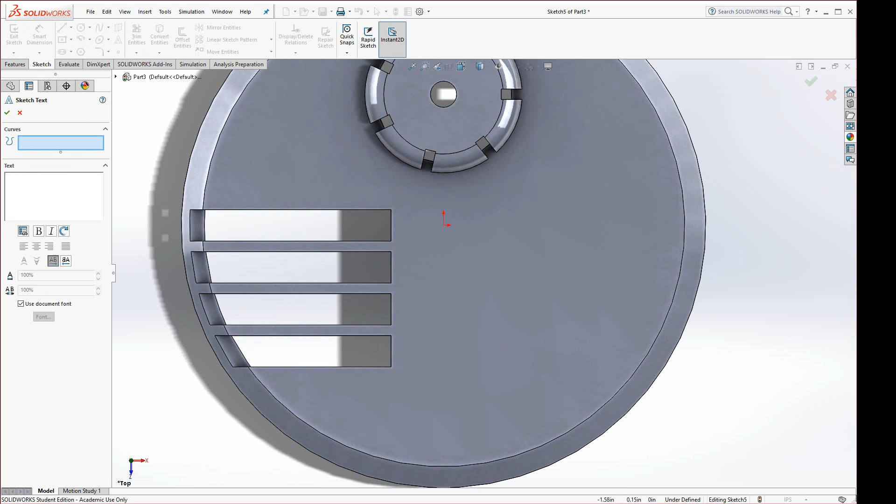Okay, now the embossed text. Select this face, start a sketch, go normal to, and we're going to go ahead and put in some text. Just going to type in here. Go with Castello. You can put whatever you want, put your name on it. This is just a fictional company name.

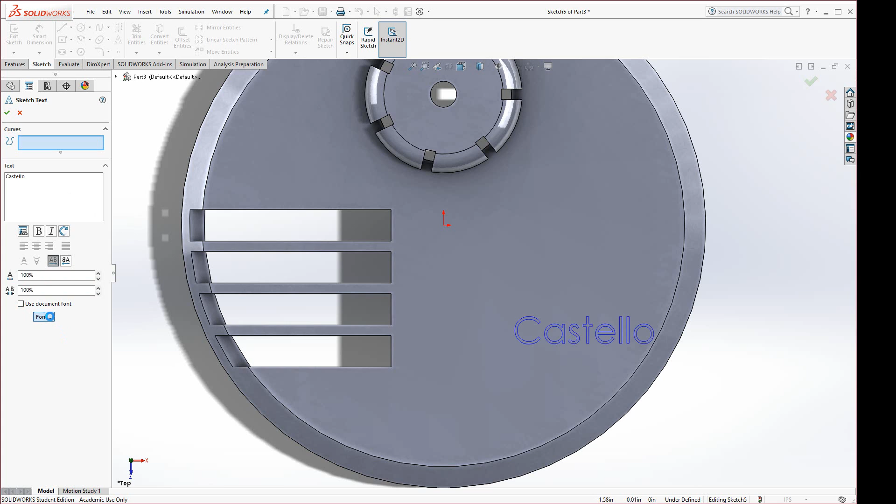I'm going to go to font. I turned off use document font. I'm going to font here. I'm going to select something a little bit more elegant or interesting perhaps. Yeah, that one looks good. It's not very elegant, but it looks okay. Alright, and we'll keep it at 0.125. Hit OK. And just locate that.

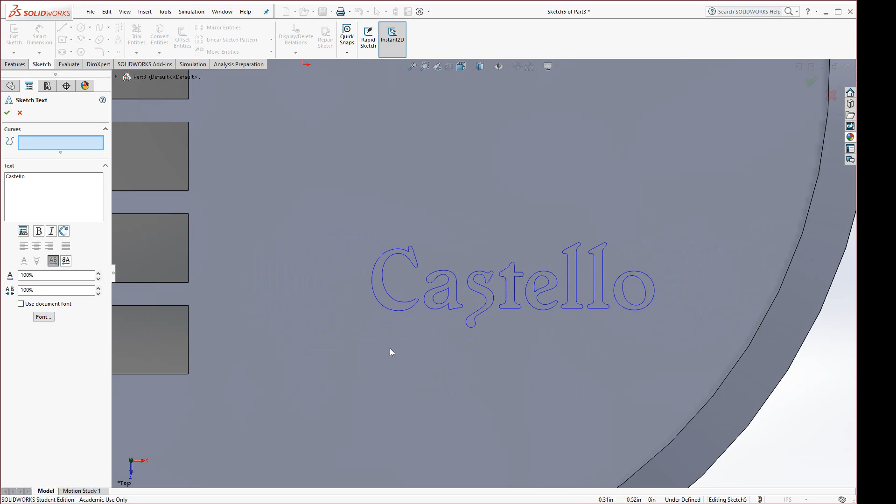Now the thing is, you want to make sure, oh, look at that. If you zoom up, if you see things like this, that's not good. All those double entities, that's going to fail for sure. So go to Font and select something else. Let's try this one. Okay. And hit the green check mark.

Go to Features, Position. You could drag this to relocate the position. I'm just going to go to Extrude it. In this case, you want it embossed. And we just wanted a very minimal height, so 0.02.

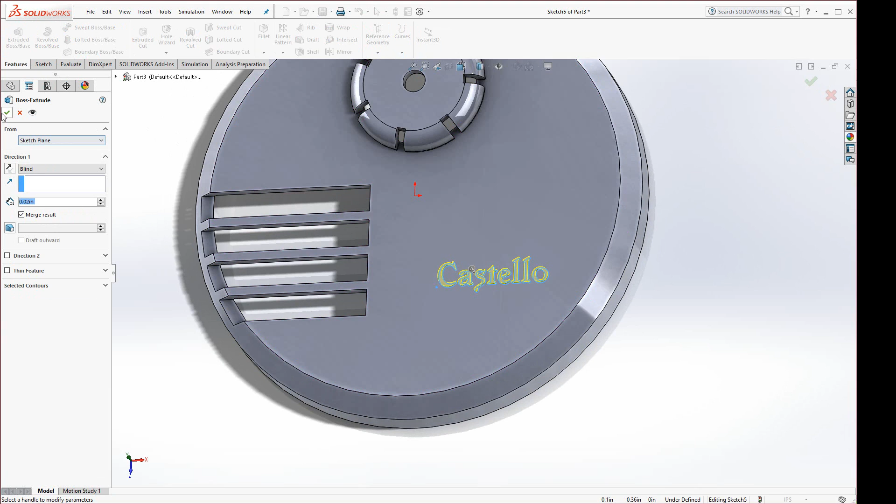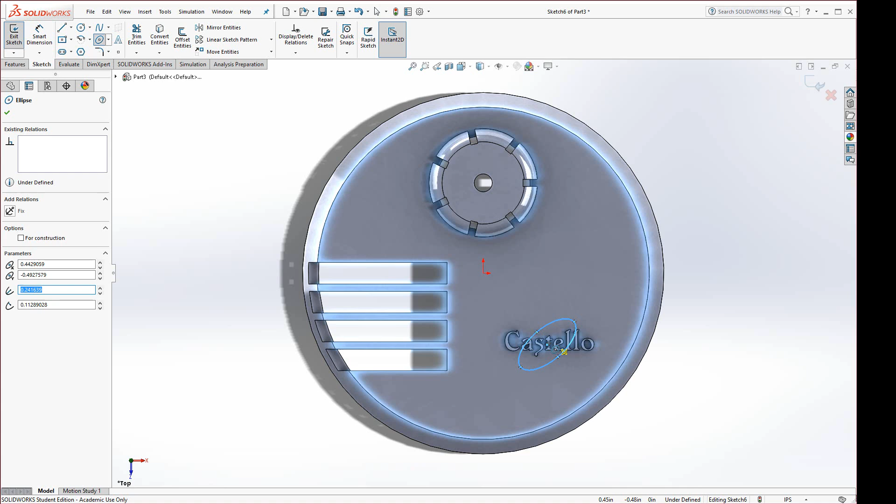Okay. And then that other little design, we could select this face, start a sketch, and go Normal To. And all I did for that, the ellipse tool was used, and I just try and find something that looks like the center, create one ellipse, and create a second one underneath it, a little bit smaller, and it gets thinner around this area here.

And I go to Features, Extrude Boss, and this one's only 0.01, so it's not even as high as the text.

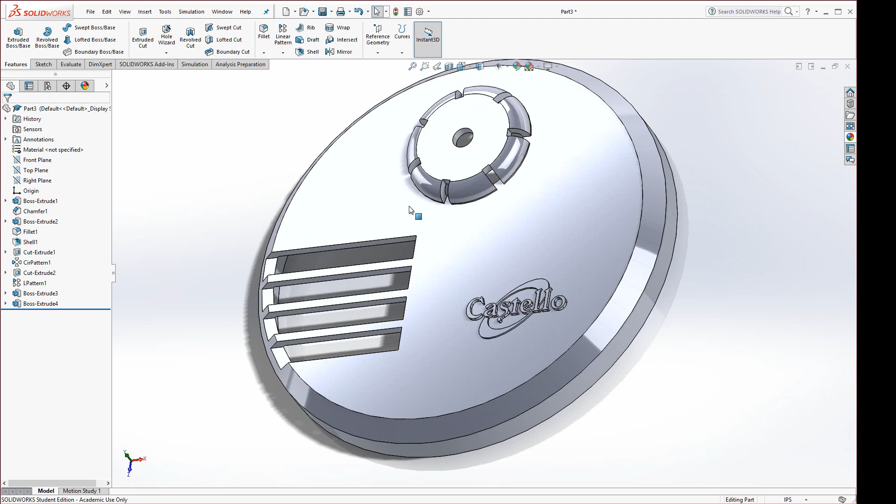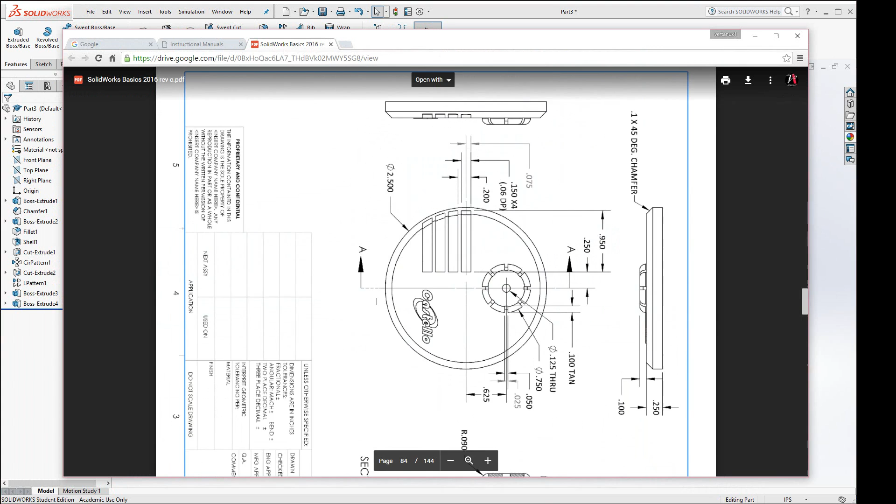And if you like, you could paint it, select the face, and go to the Boss Extrude, and let's make that green. And that completes that lab. That completes exercise 7.